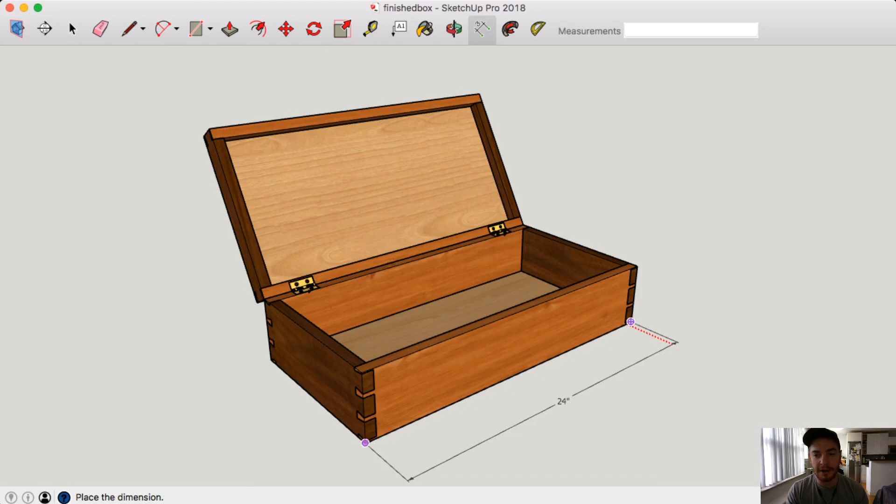The other cool thing about it is I made all of my parts accurate to my actual jig that I use to make dovetails, and that's cool because I can take these parts and print them, and I know exactly what dimensions I have to make everything. The other reason that it's useful is, say I was making a drawer box, then I would know exactly what sizes of drawer boxes I can fit in each cabinet, and it's a really easy way to not have to do this again in the future, because every time you draw a complex model like this, it's going to take you forever when you first get started.

So what I like to do is make design resources. When I say design resources, I mean stuff like dovetails. I don't want to go and redraw the dovetails every time. And what I did is definitely overkill. You definitely don't have to do everything that I did. But I like it because it saves me time, and everything that saves me time and increases my workflow makes me more money. So let me show you quickly what I did. Let me pull this up for you here.

This is definitely overkill, but I use a Leigh dovetail jig. I use the RTJ 400 when I make dovetails, and it's a router table dovetail jig.

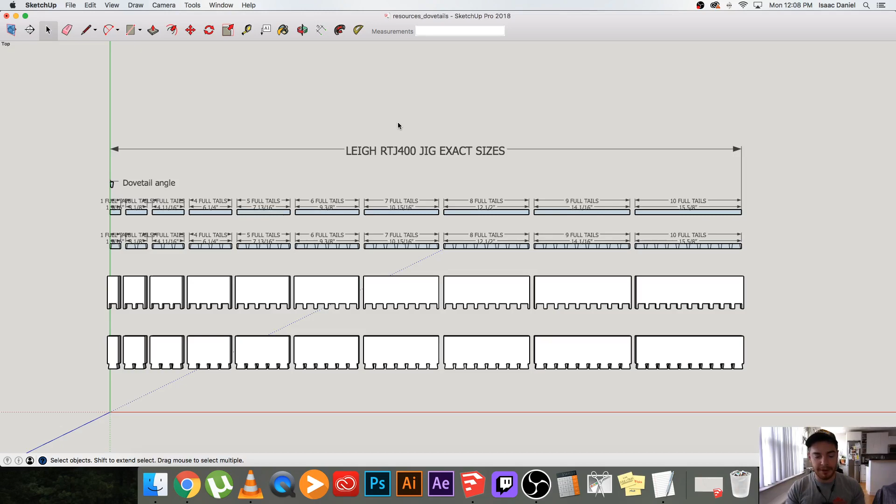Drink some coffee. It's a router table dovetail jig. The cool thing about it is it runs on the router table, so it's really easy. I don't have to hand cut it every time. One thing about it that's a little weird is that they have these odd sizes.

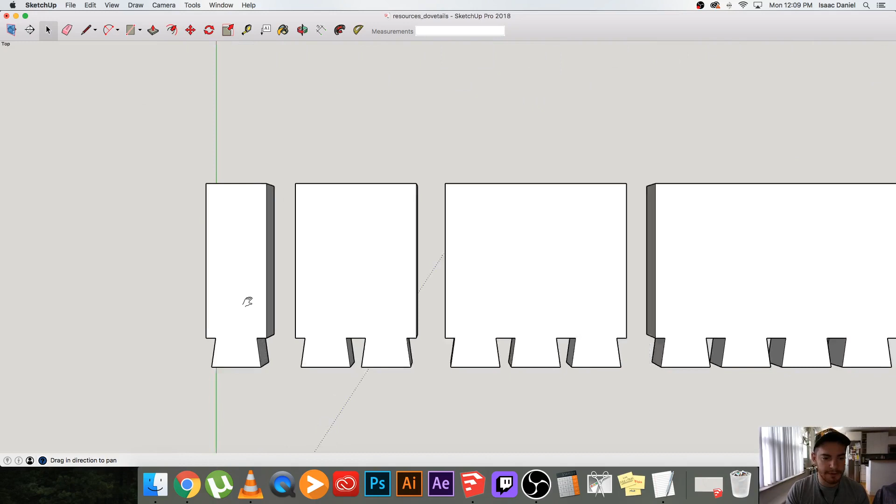Let me just zoom in here to measure the full tails. So when you count the tails, this is one tail. Or sorry, that's a half of a pin. But let me zoom in here. You can see what I mean. These are tails. That's a tail of a dovetail. So they count it by full tails.

The weird thing about the RTJ 400 is that it goes in 1 9/16 inch increments. So 1 9/16 inch is one full tail. 2 full tails is 3 1/8 inch. 3 full tails, so on. I'm not going to go through the whole list, because obviously you can go up to 10 full tails on this thing, and that's 15 5/8.

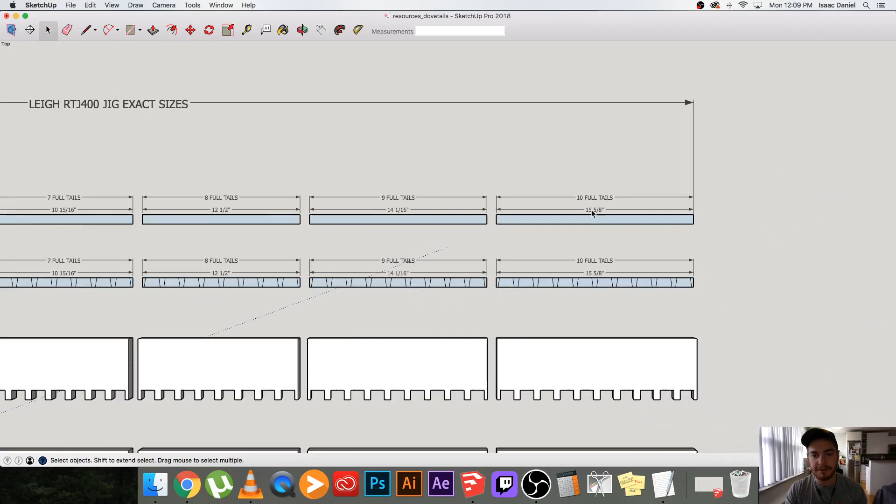That's plenty big for most applications, and that's going to be the actual height of the drawer. So that's a tall drawer, 15 5/8, or a tall box or whatnot. I probably wouldn't do anything more than that. You could do 2 panels and laminate it together.

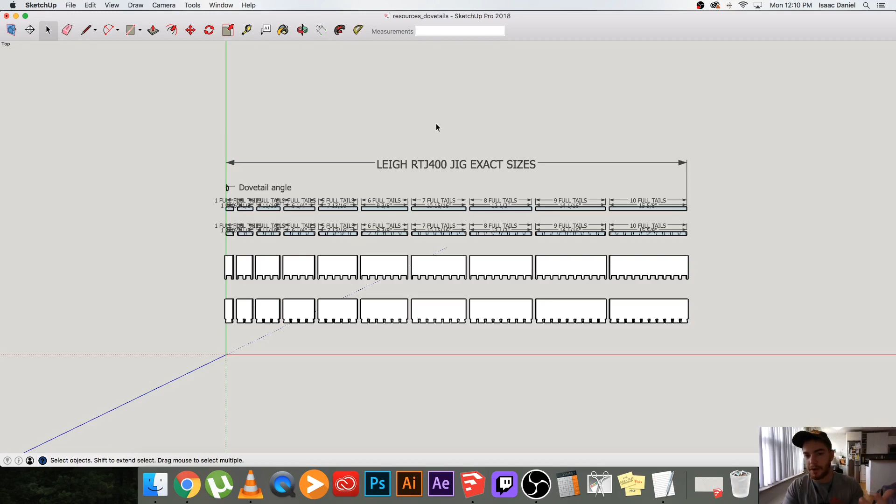But so this is my design resources. I save all my files, resources, dovetails. That way I can go through my different resources, other things I might have, like textures or live edge boards. I don't want to draw a live edge board every time. So here you are. There's your Leigh RTJ 400 exact sizes.

Now, you might not use a Leigh RTJ 400, so my sizes are not going to be the most useful thing to you, but I'll show you how I did this layout, and you could do a layout like this.

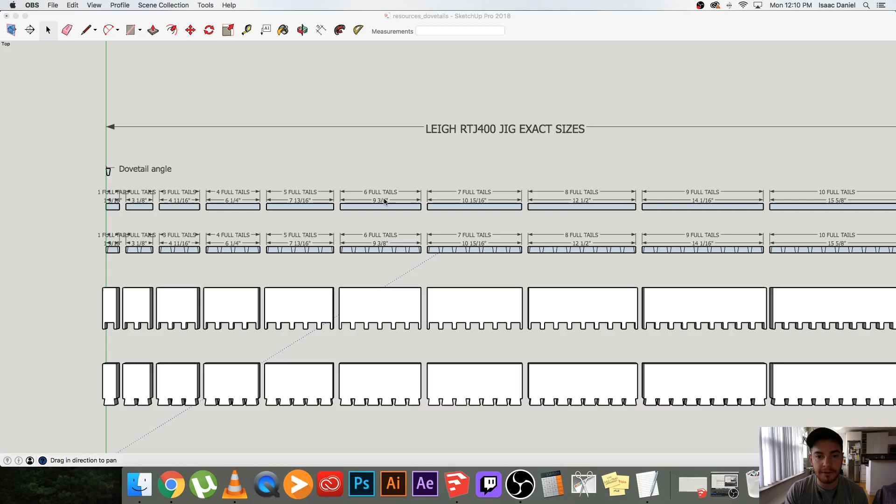Like, say you're not using the Leigh RTJ400 and you don't need to do 9 3/8, 10 15/16ths. Maybe you just want to do 2 inches, 3 inches, 4 inches, 6 inches, 7.5 inches, whatever. I'll show you how I did this quickly, and we'll go from there. But I'll show you why it's important.

The reason why I have this resource is when I go to a box like this box, let me just pull this up quickly here, I don't go and draw this every single time. I pull the shape from SketchUp, and I just add my textures. It's way easier. This is the same dovetail as on the list.

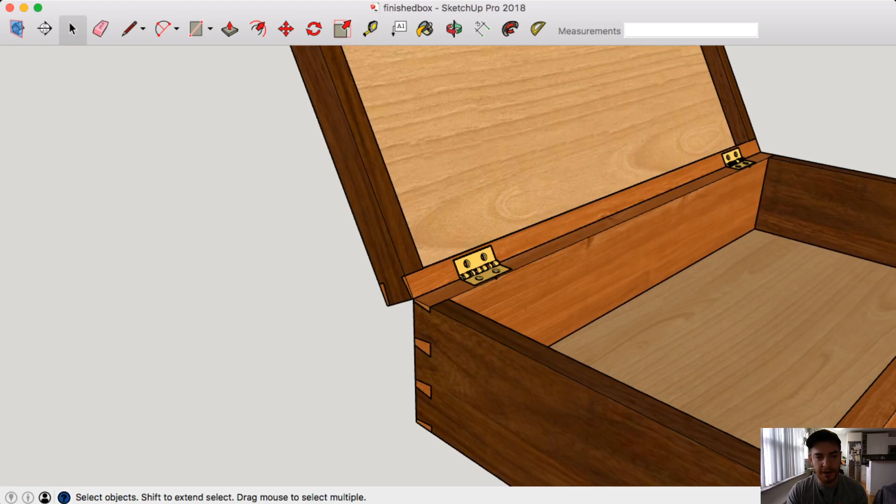The other thing is if I'm going to make a box, I'll make the box and I'll cut it just like I would make the box on the actual table saw. And I can see all these parts. I can see how big all these parts are. It's super easy. So start from the beginning. We'll do a quick rundown of how we actually do this, and then we'll go from there.

So if you are using a dovetail jig, you can usually find it on the internet. Go to your browser, search whatever manual. So dovetail jig XYZ, I don't know what the one you're using is called. I use the Leigh RTJ400 manual. So you just Google that. Everything will be on the internet. It's a great thing about the internet, everything's on there and it's ready for you. So pull this up.

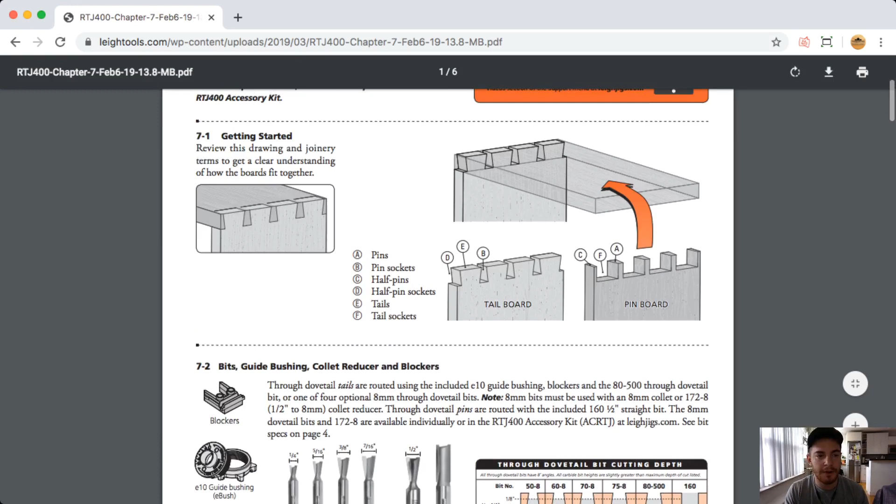For us, it has all this stuff laid out here because Leigh is amazing like that. So you got half pitch here. I think I did mine for full pitch through dovetails. So just check that out. And you could do whatever here. This isn't really important. This is just me rambling to give you a sense. So they have all the information you'll need, and we're essentially making something like this. We want to make this tailboard and that pin board.

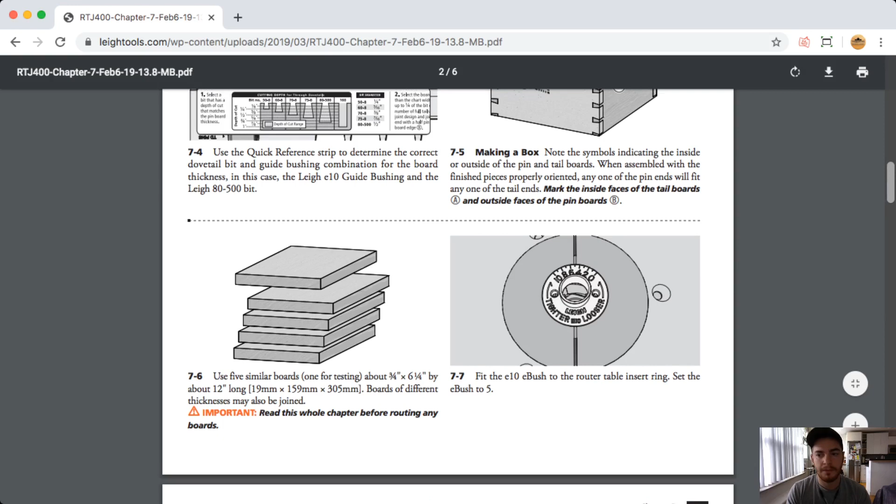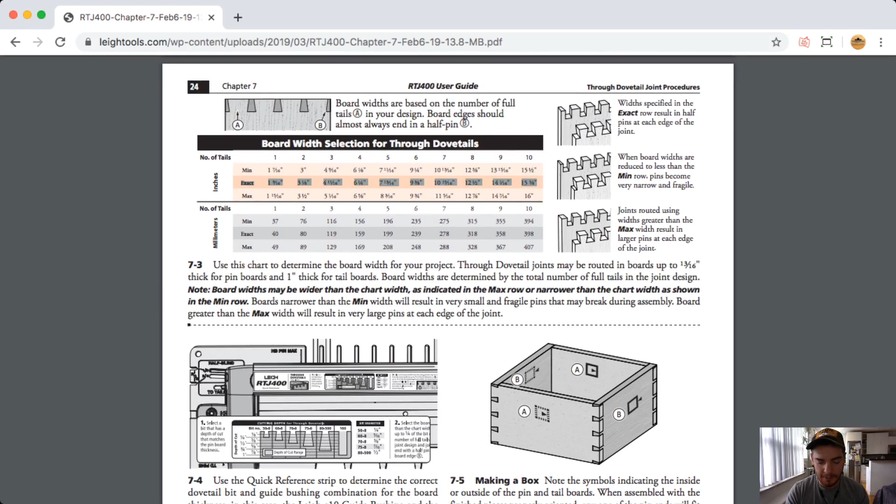But the cool thing, let me just get to where it has it on here. Their website's pretty slow. This will be one of those things where in the description I just say skip ahead to that section. So here we are. Let me pull this up a little bigger if I can for you.

So these are the exact sizes for mine, and as you can see, it goes up 1 9/16 every size. Which might not be important for you. You might, as I said, just be doing even increment sizes because that's what you make. The important thing is we want to make this board. This isn't actually capturing it.

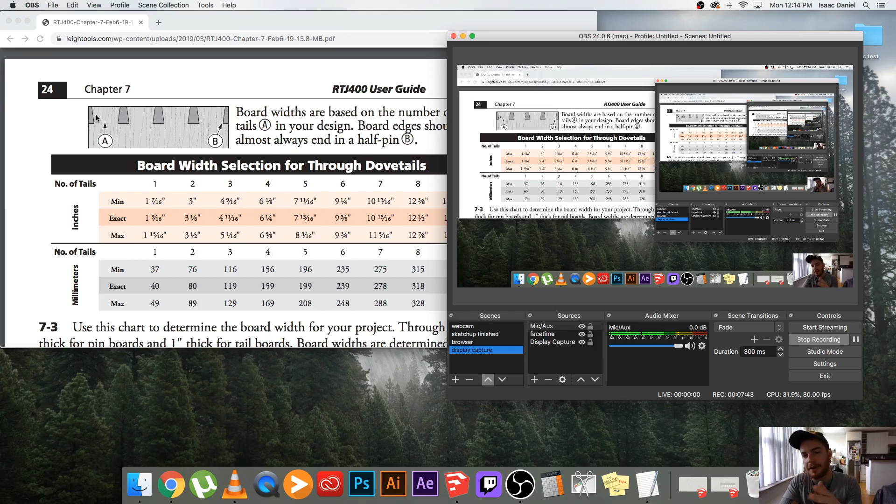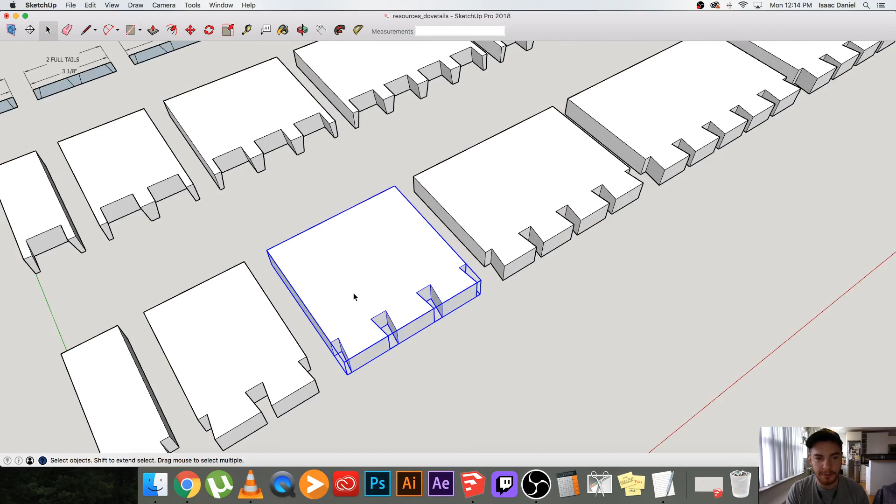We want to make this board, where we have every version of our full tails, and then, if you're going to make more and more boxes and they're all kind of a standard, you want to have these standards already done. So, like on my jig, I have every box I'm ever going to make in these parts already. So when I look at this, say I want to make a box with this size, I have my pins board, or 1/2 of the length of it, and I have my tails board. So I'll show you why that's important.

So let's pull up a working file here. And it doesn't really matter what size box you're going to do. These guys, 4 11/16, that's probably fine for a drawer or a box. So let's pull that up. We'll go to our working file here. We're going to take that.

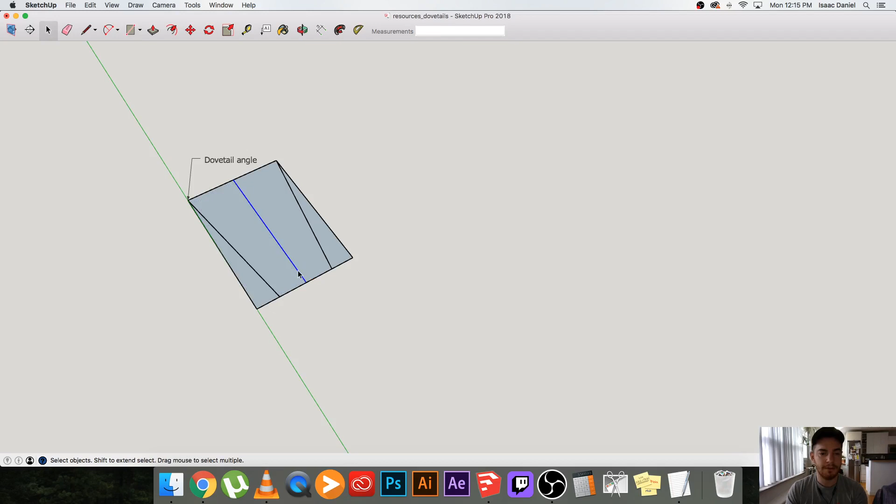So how did I make these? I have this little angle here. That's my router bit that I use. But say you're hand cutting it, maybe you're hand cutting this shape. Well, what is this shape? Essentially, what this shape is, is the size of half of your pin and the depth that you're going to cut.

So I actually usually make 1/2 inch or 3/4 inch thick boards for drawers, or 5/8 of an inch, depends on the project. So that's what you're going to want, is figure out whatever material it is that you're going to do. Say you're doing 3/4. What you want to do is make this shape.

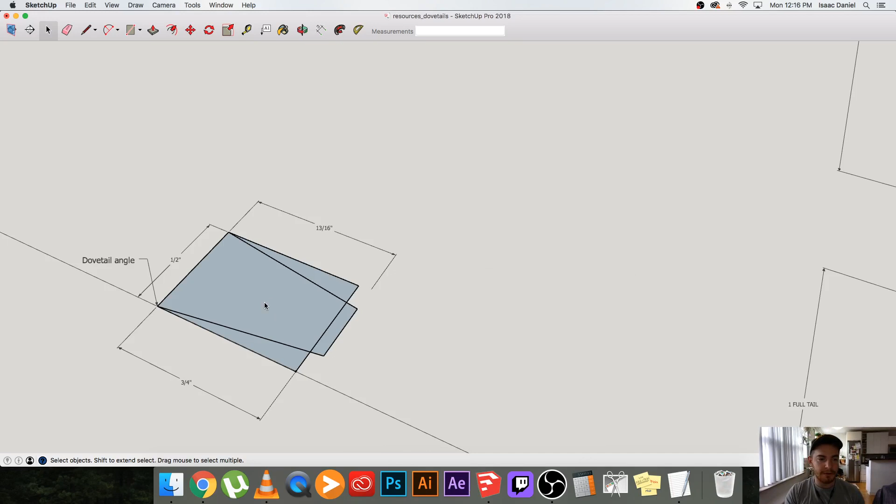So, a common dovetail joint is 8 degrees. You might have it in a ratio, 1:6 or something like that, which is totally fine. Let's say you're doing something like me, where you're doing just an 8-degree joint. I'll show you how I did that quickly.

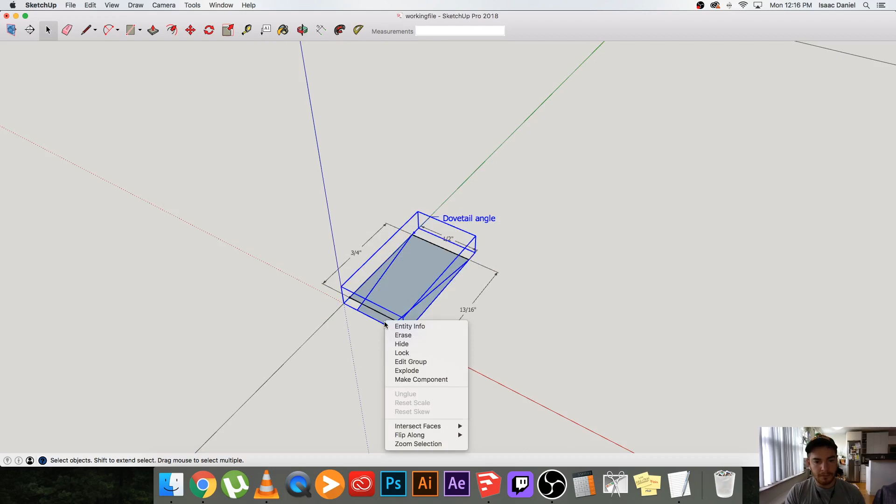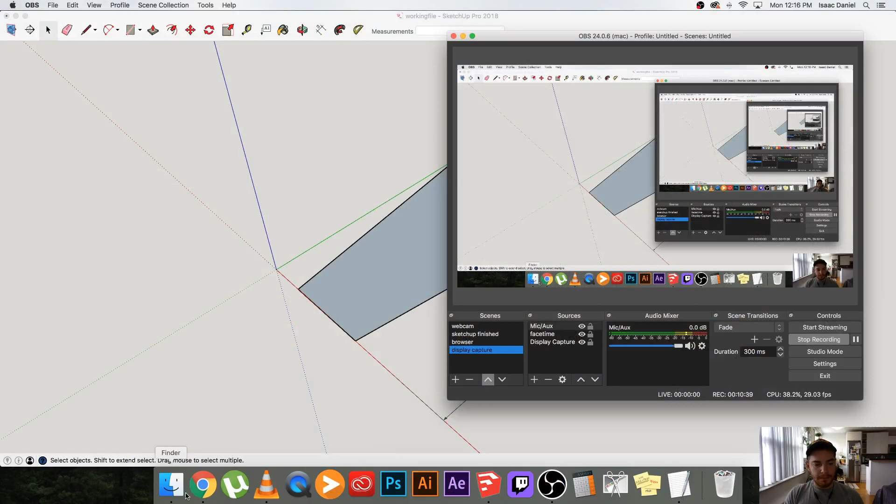So specifically for my purpose, we'll delete this just because we don't need this for a second. The Leigh dovetail jig uses router bits to do the cut. You can look up the different Leigh router bits that you might use in your jig. So let's look that up.

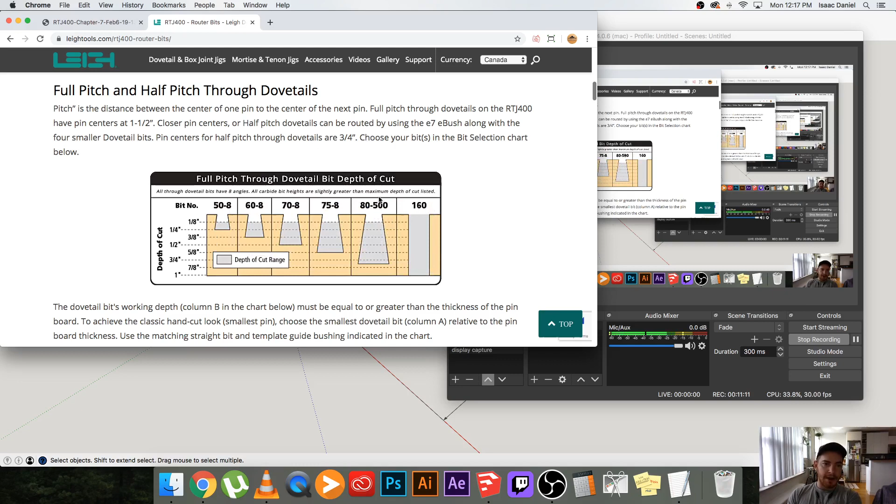Just give it a second. The Leigh site's really slow. The cool thing about it is, say you have these sizes here. I know I'm going to use the 8500 to do the majority of my dovetails because it's a big bit. It's a 1/2 inch wide bit, and it makes a nice looking pin.

Leigh's site has all of this information on it, and all you really want to do is see this image here. It shows you, sorry, I zoomed in too much. It shows you the depth of the cut that it can do and the overall diameter of the bit, and that's what we're going to use. Oh, that and the angle of this bit. So scroll down here to the 8500. So 8500 here.

You have B, which is your cutting depth range, they call it, 13/16. A, your overall diameter, 1/2 inch. And it's pretty small there, but F is your angle, 8 degrees. And that's 8 degrees from the side to the cutting tip. So that's your 8 degrees, not from any other point. And you might screw that up the first time you measure it, but I'll show you why that's important.

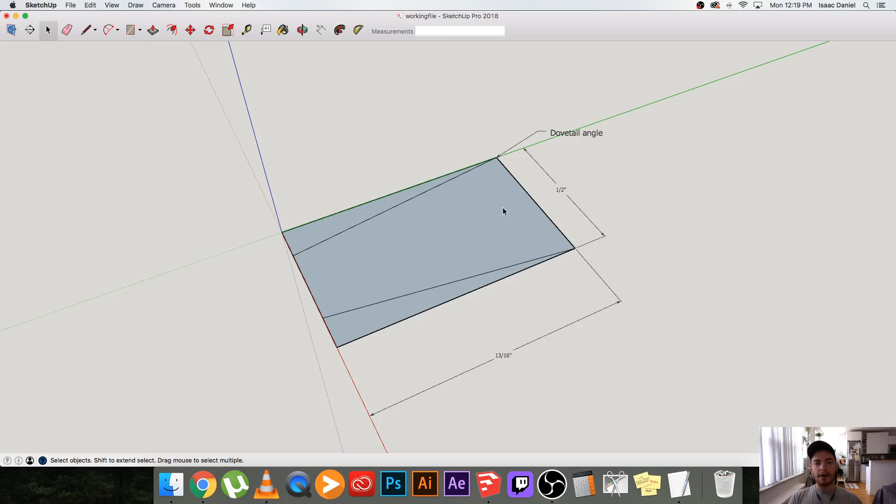So here's our dovetail jig. So let me just make this rectangle. It's easier to make it this way. We have our 13/16, which is our actual ability to cut on the Leigh router, and we have our 1/2 inch cutter head, which is the actual width of this cutter head on the Leigh jig. And if you go into here, there's our 8 degrees. You can see it at the angle finder at the top.

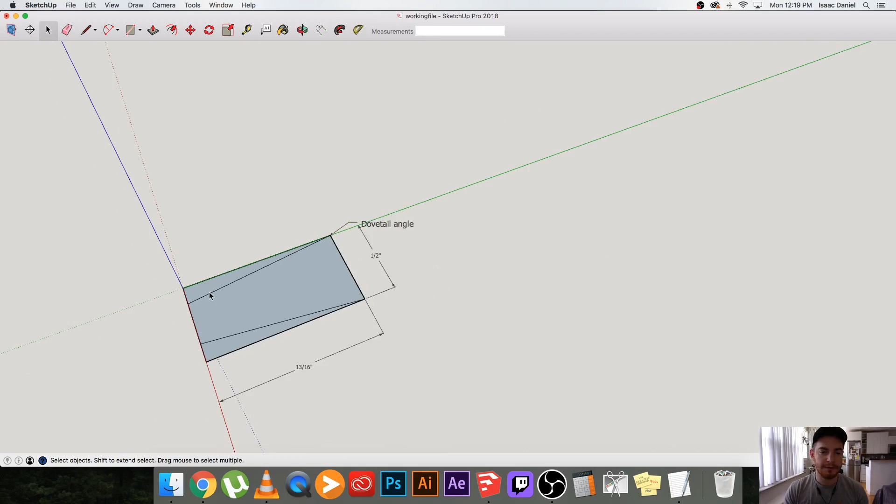So you might not be using that cutter, but say you're using another one. Say you're using something that's 10 degrees, something that maybe you have 3/4 inch, let's say. It's 3/4 inch length, and it's 1/2 inch cutter head. So there's yours. Just imagining that's what yours is. Take your actual router bit, measure it, or look online, and you'll see that.

You can take the protractor tool in SketchUp, go to one of the corners, go from one of the lines, and put whatever angle it is that yours is. So say yours is 10 degrees. You can pull up your line tool. I just press L, or you can go to the actual tool and click line. Go from the corner, and SketchUp will snap to that new protractor point that we put in.

Do it again on the other side, and you've got your cutter head. And that'll all be accurate to your actual router bit, and that'll be cool because your actual file will be exactly what you're making. So just finish off this rectangle.

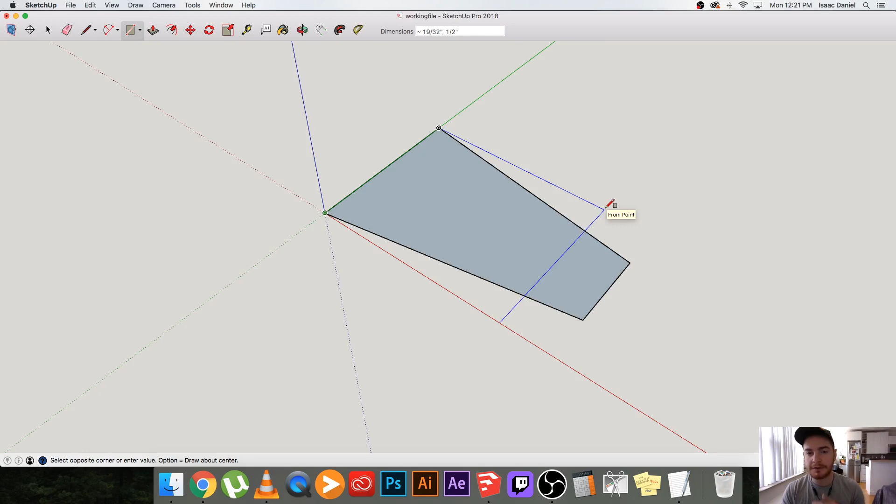The next thing that you're going to want to do is figure out what panel thickness you're going to do, whether that's 1/2 inch panels for your walls, or 5/8 inch panels, whatever board thickness it is that you're going to use for yours. So you're going to do 1/2 inch boards. Finish that rectangle. You can go ahead and delete the rest of these angles now, and you're left with this square, and I'll show you why that's important.

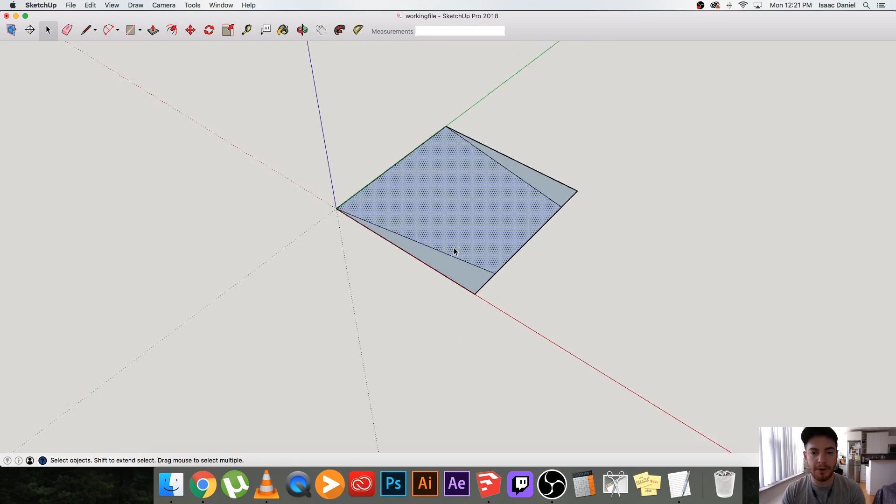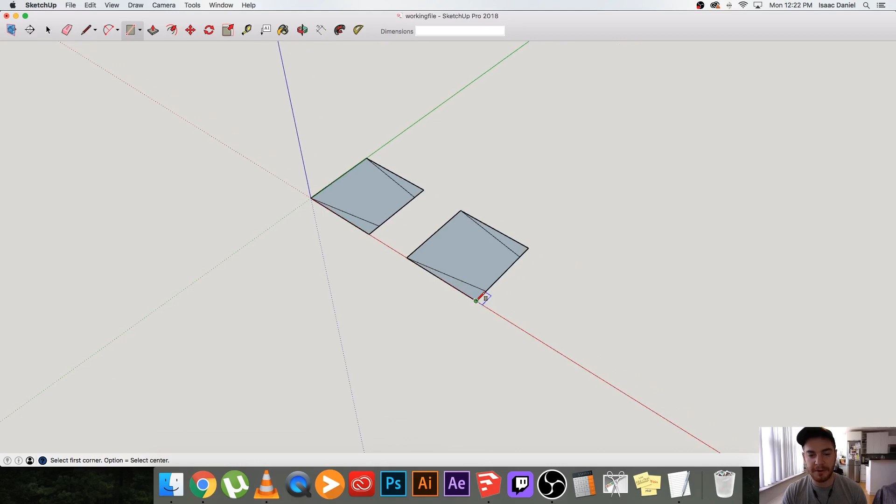Take this square. As I said, the Leigh jig uses 1 9/16. Yours may not use 1 9/16, but we'll just assume that we're sizing our boards appropriately with that. You could also be hand cutting these where you would take your compass and divide it with your compass, but we'll just assume that this is similar to my jig. But as I said, it can be anything.

Take this object, paste it in, and essentially what we've done is created our first stage of our tails and pins as a 3D object. You can delete the rest of that stuff, or you could keep it.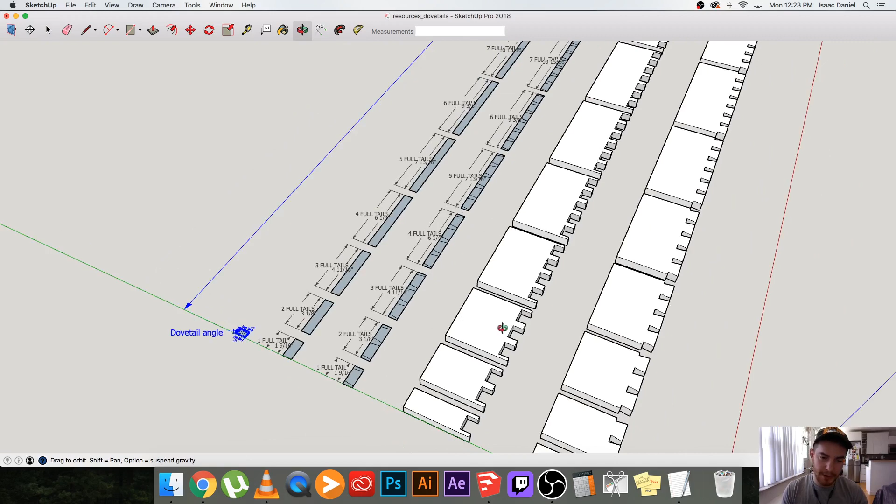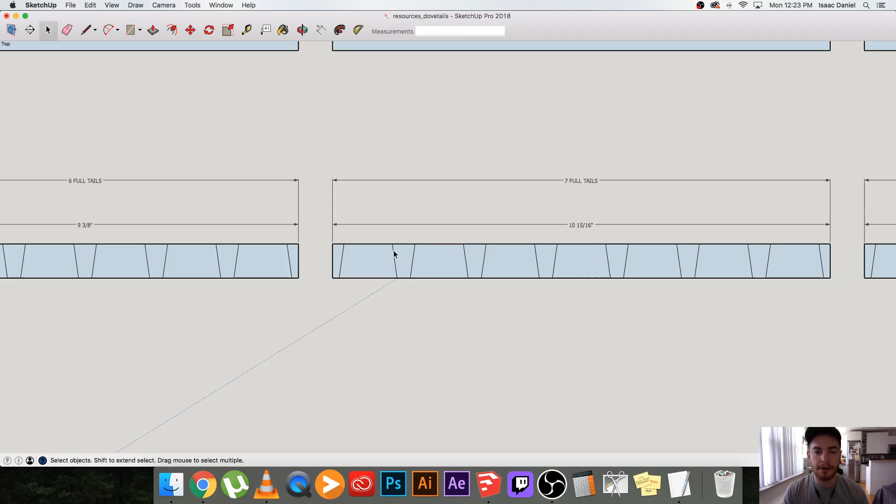So I'll show you what you can do with this. I use that to make all of these, and I'll show you my resources. I have it organized so that I have all of the artwork that I'll ever need to redraw any of this stuff in case I need to do something a little bit different. Say I want to have a point in this where there's a channel to put a drawer bottom or something like that. I don't have to go and redraw all of this stuff as a model. And everything here is accurate to the actual size that we're going to make.

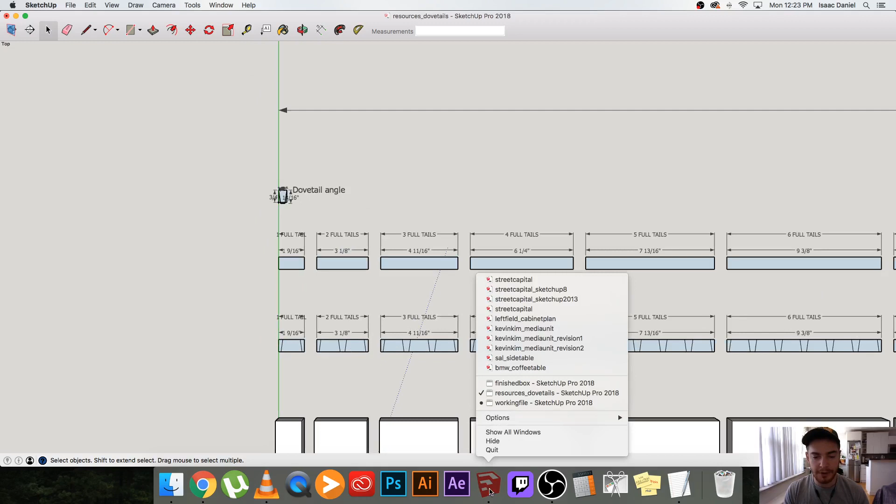But all you essentially need is this piece, that original one, and then you can do as many in a row as you want. And I'll show you how I did that. Go back to our working file here. I could take this, 1 9/16 increment, or yours might be 2 inches or 3 inches or whatever size you normally do between your tails. Now we've got something that we can use to create the tails and the pins board. So I'm going to rotate this quickly just so it's easier for us to follow along.

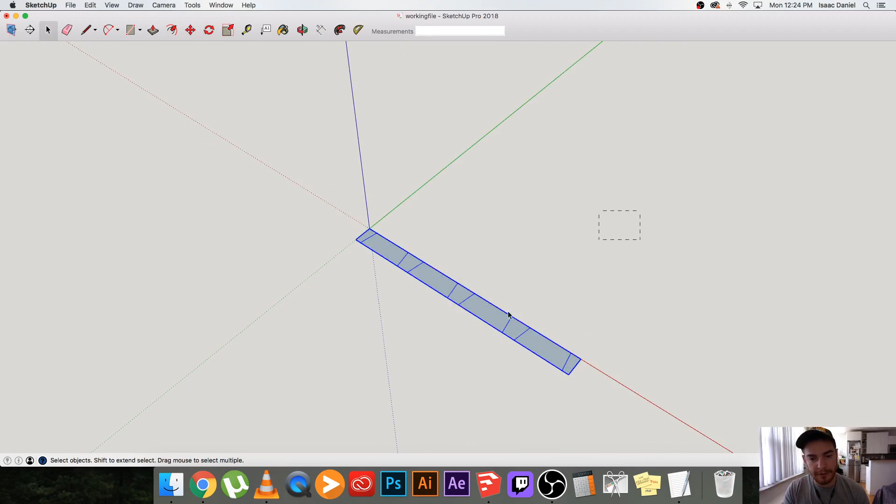I want to make this a group so I don't have to redraw this again because I hate redrawing stuff. I'll copy it, and let's make the pins board first. It's a little bit more straightforward. So you got your file, it's copied, it's a group. Let's go and explode this quickly. Take one of your pins, and we're going to push it up. You can see it's already starting to look like a pin board, right? Our boards are 1/2 inch. That's the thickness of our finished boards that we're going to be planing down or sizing. Whatever we're milling to is what we're making our pins push to.

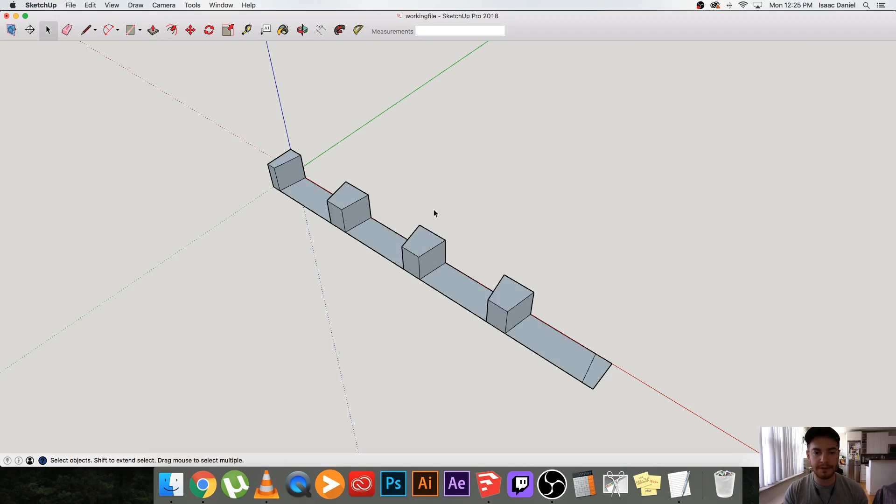So I took the push-pull tool. It's P on the keyboard, or you can go to your actual tools bar and grab it, push it up. You could either follow along the points that you've already pushed, or you can go anywhere and go to your measurement section and just write 1/2 inch. Same thing for the last one. We'll just snap it to the same place. So there you go, you've got pins. Make that a group.

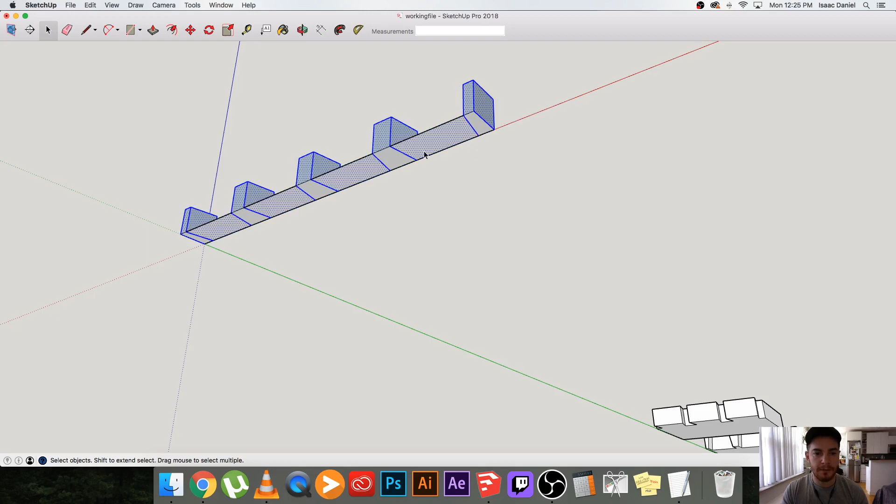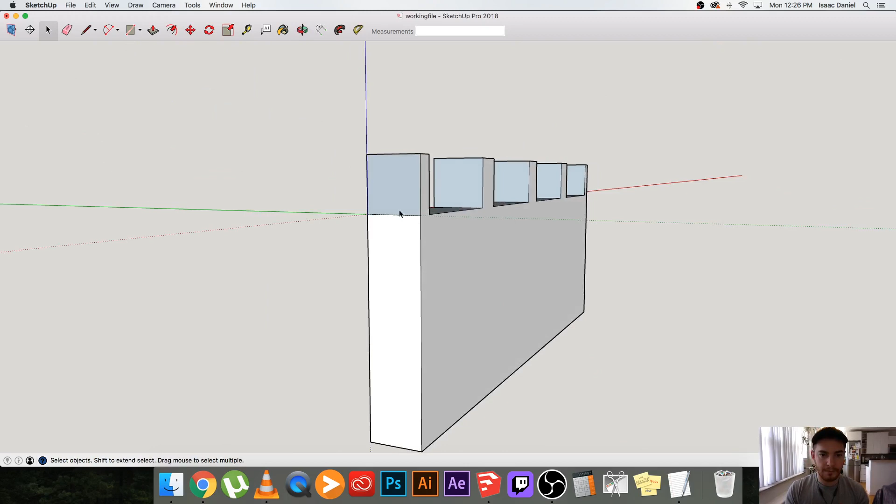So you see at the bottom of it, we're missing some geometry here, right? Let's go and make a rectangle here. Explode this. Sorry, keep that rectangle. I usually like to make these some amount of inches just so it's easier to see. It doesn't have to be anything in particular. Go and explode this. You can delete all these lines now. Now you've got a pretty good resource for a pins board. And I only do 1/2 of it. I don't do pins on both sides, and I'll show you why.

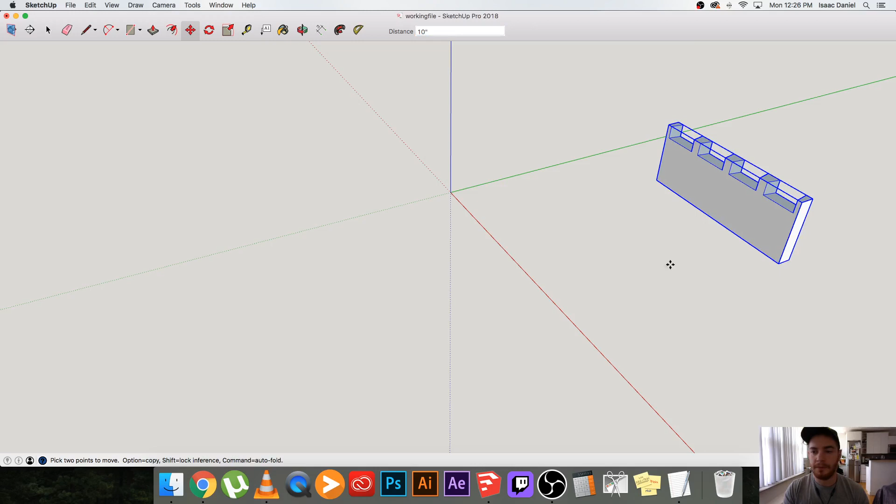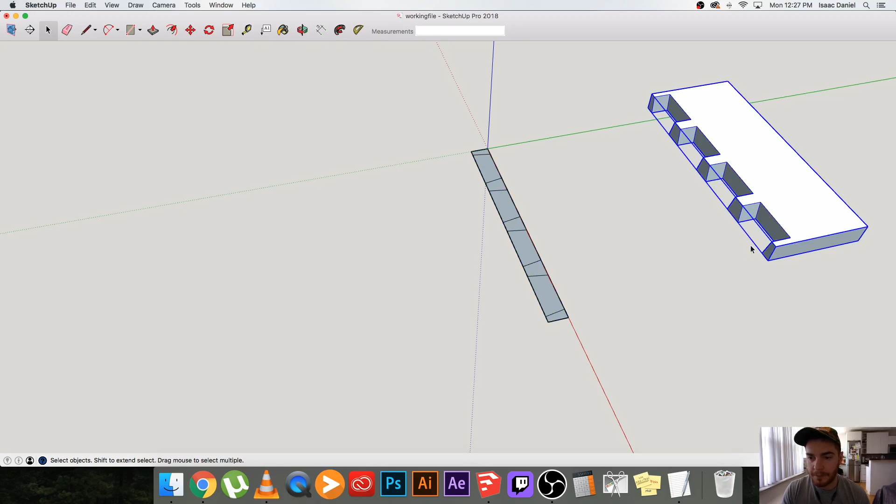Let's just move this over a little bit. We'll rotate it just so it's easier to see. So now you got your pins board here. Let's flip this around so we can reference it. Here's your pins board. Your pins come out of the board. Now we have to make the tail board where the tails stick out and then a board comes through it. Honestly, everything on SketchUp is pretty easy to get a grip on. We're gonna go back to, guess what, the push-pull tool. Hey, you could draw these rectangles by hand. I barely draw out shapes by hand if I don't have to.

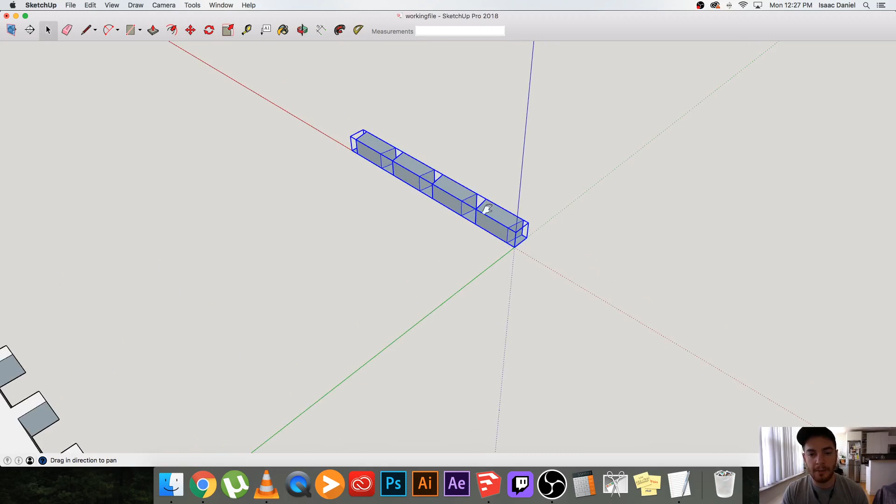Push it up, whatever our board thickness was. Remember, our board thickness was 1/2 inch, so we push it up 1/2 inch. But it could be 3/4 inch or 5/8, whatever you make your panels to. And that'll probably depend on whether you're doing drawer boxes or regular boxes, anything like that. So you've got your pins pushed out. Now, the last time we made a rectangle and we pushed it down to create our pins, this is going to be a little bit different.

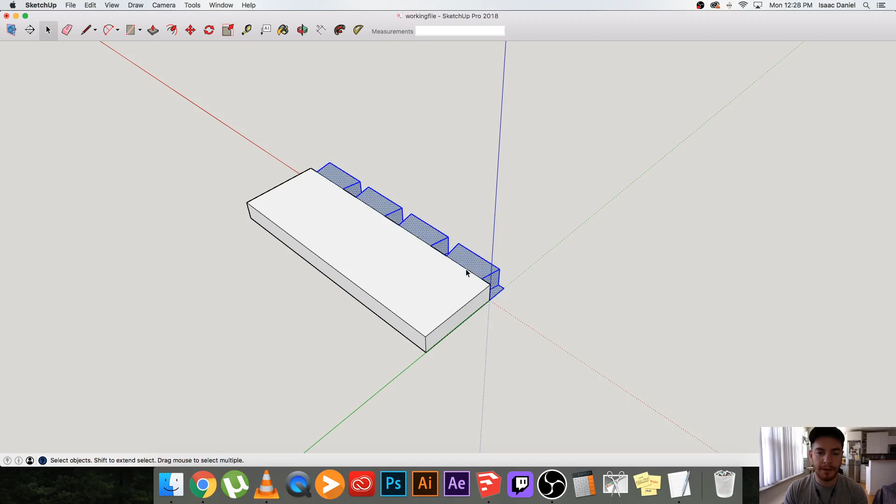We're just going to take our rectangle tool, draw out some rectangles, because our pins go at the opposite orientation. So we want to make sure that it's going the correct orientation for what pins are. And once again, we can go and delete a lot of these lines. And you've got yourself a tail board and a pin board, or half of each rather.

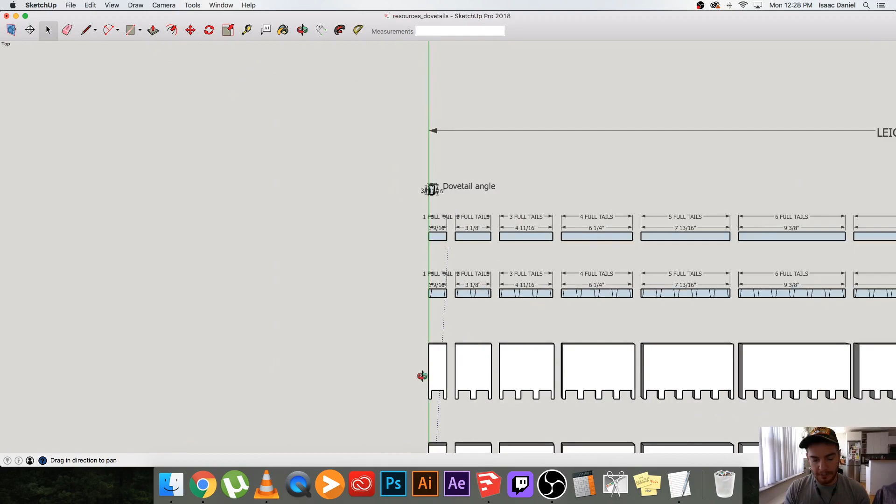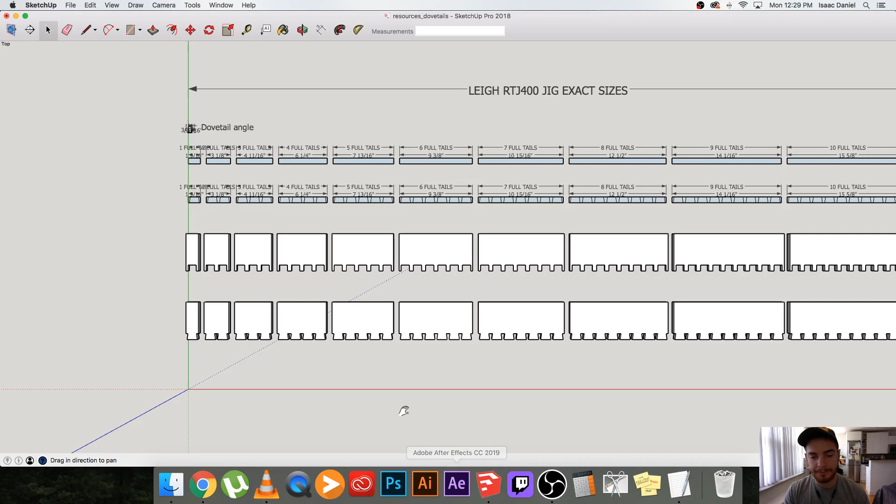Now, when I did my absolutely ridiculous resources section, I didn't go and make that over and over again all the way up. I just made the first one pin, and then I doubled it and I deleted lines. I didn't go and draw that whole file every time. Otherwise, this would have taken me forever. But because my jig uses 1 9/16 inch increments, it worked really well for me. And yours might be similar, but in any case, we'll go back to our finished box.

So now we've got these two pieces. What do we do with that? We got to build a box. We can delete these because we don't really need to make those exactly like that. So we'll take this, make a group. That's already a group. And we're going to orient this as if we're building one side of our box. So our box is standing up.

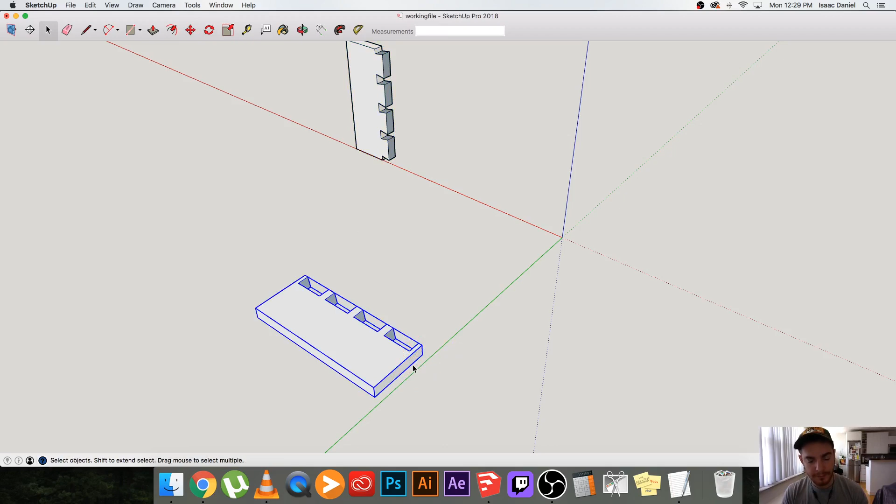These are going to be our pins, so we'll move it over. I'm just using the move tool, M on the keyboard, and the rotate tool, which is Q on the keyboard. So I'm not going to explain every tool that I use all the time. If you have any questions, feel free to message me.

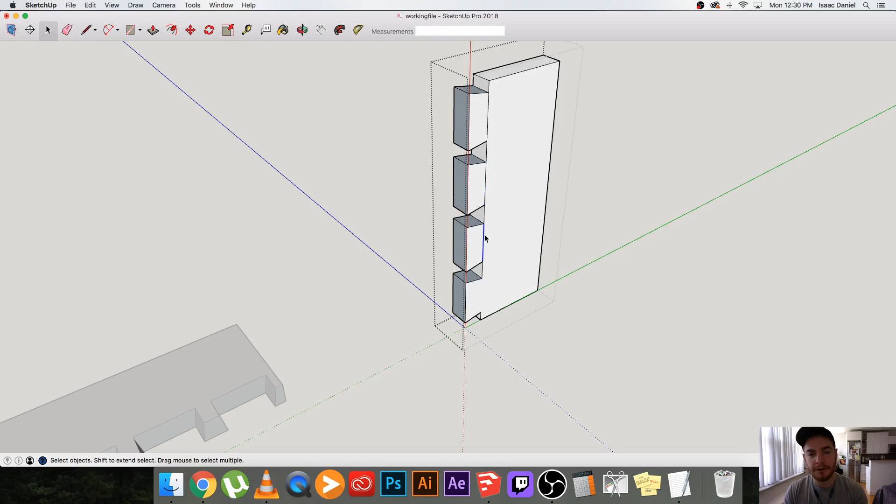And we're missing some geometry here. What happened? Sometimes when SketchUp's missing geometry, you just have to go and redraw the lines because it's not going to guess the lines for you, but it's pretty straightforward.

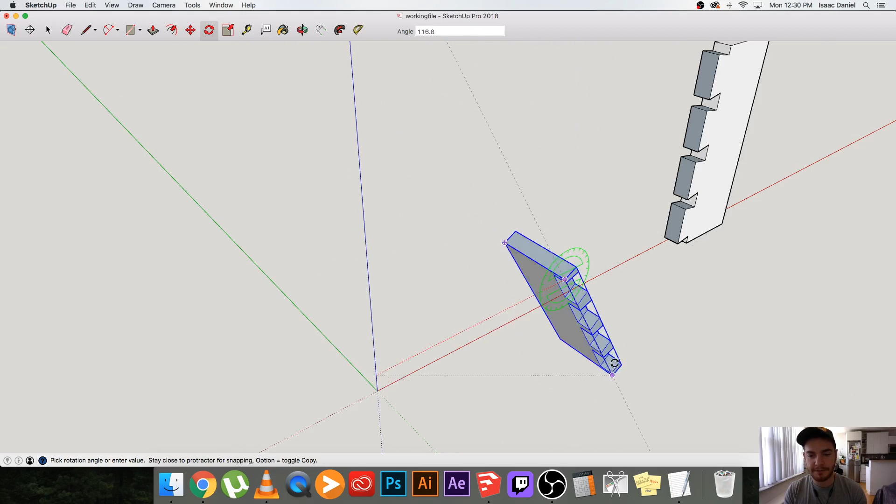So we'll take this board and we'll rotate it again so that it's standing up. You can just press the arrow keys to go to the different rotate abilities. We want to rotate it along the green axis, 90 degrees. Stand that up. Now, if we've done our measurements correctly, these two will line up. If we haven't, they won't. So we've got one corner.

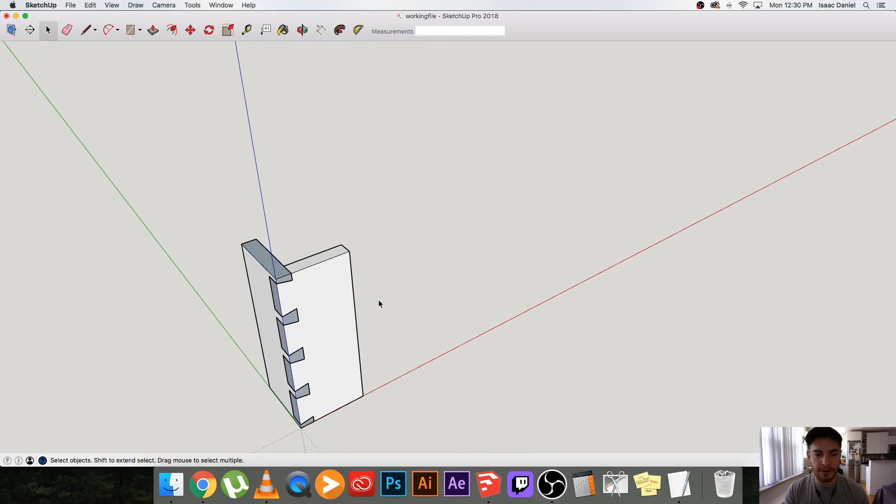You could have built each one of these specifically to whatever size you want, but I don't do that, and I'll show you why. I have these two pieces. Say I want to build a different size box. Say, normally I make a box and it's 12 inches deep and it's, let's say, 24 inches long. But the next time I build a box, it's only going to be 6 inches deep. I'd have to redraw that entire panel, which is crazy. I'll make it bigger just so it works better on this video.

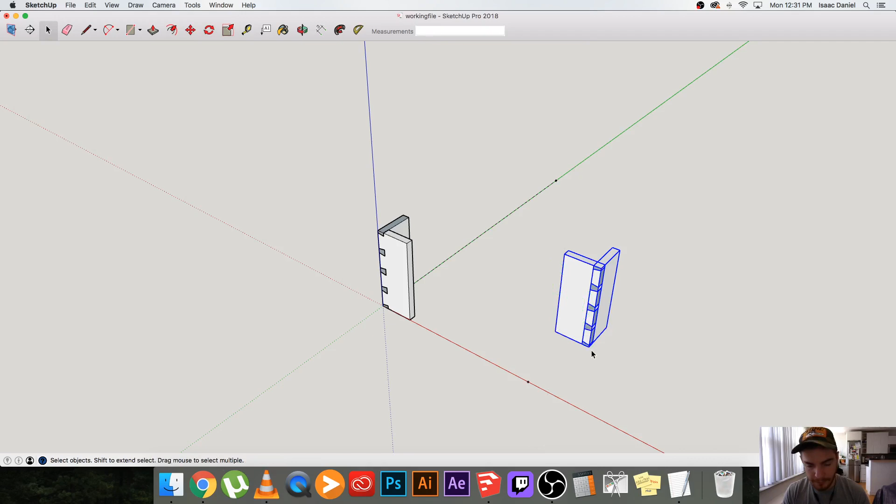But take these two parts, copy it, Command C to copy and Command V to paste it. We'll rotate it again. And you could flip those parts as well, but because our parts are identical, we can just rotate it. And we'll just snap it to the guide point. You'll see on your screen a little thing will say guide point. That's how you know you're in the right spot.

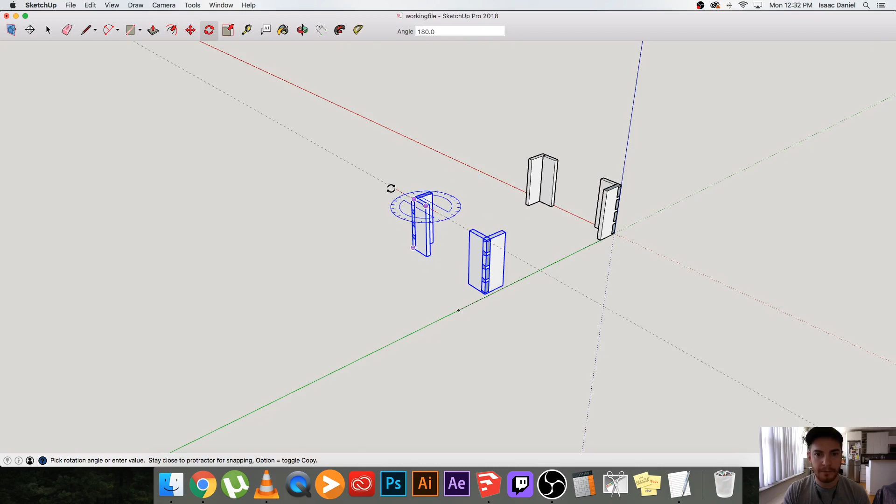And we've got one more side to do, so we'll take these 4 parts, copy it, turn our camera around. It's Command O to orbit, which is your camera movement on your viewing screen. It's O to hit that, and H brings up your hand to move things around. So Command V to paste it again, and we'll turn this 180 degrees. And we'll drag that onto our guide point. So we have our 4 corners.

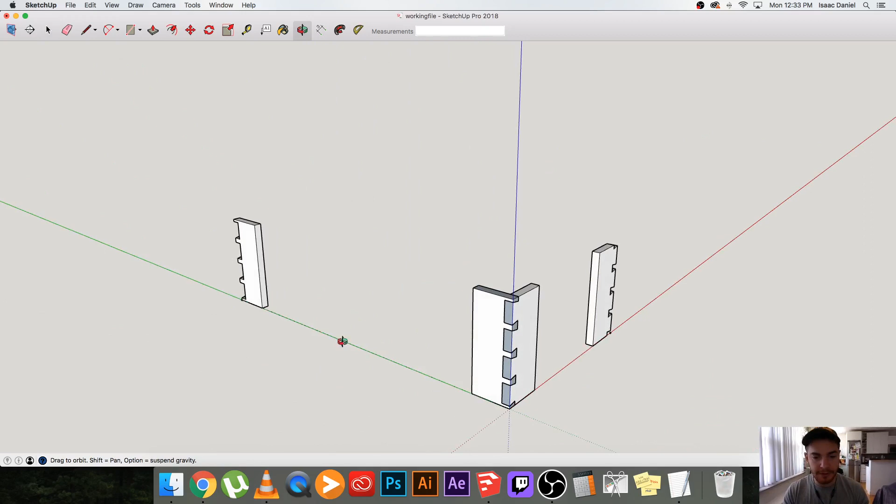Once again, we're going to be lazy. We don't need to draw every part. So we'll delete some parts. What we do need is 2 of our pin boards, 2 of our tail boards. So this is the depth of the box. This is the length of the box. That's all we need. So we'll take this board.

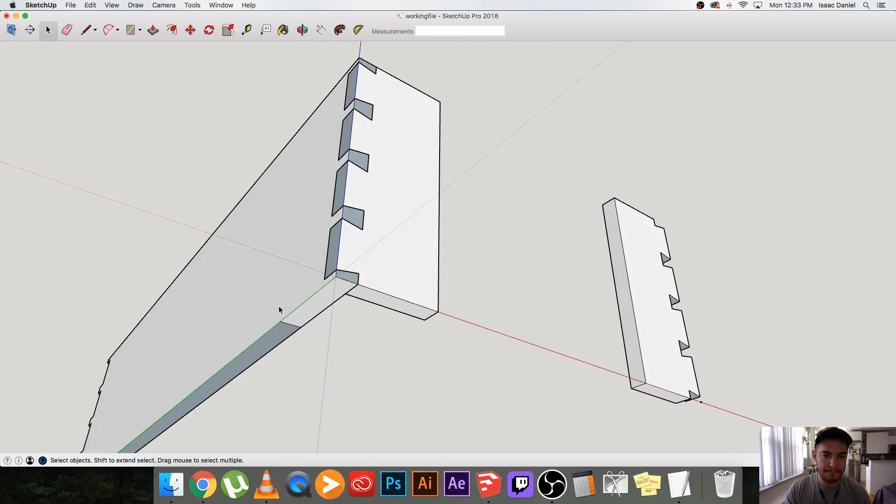As always, we're going to get the push-pull tool. We're going to use this all the time. Move that right over. We can take these 2 parts and explode them. Delete some lines. Now we've got, let's make this a group. Make these a group. We can hide this. We can delete that guy because we don't need it anymore.

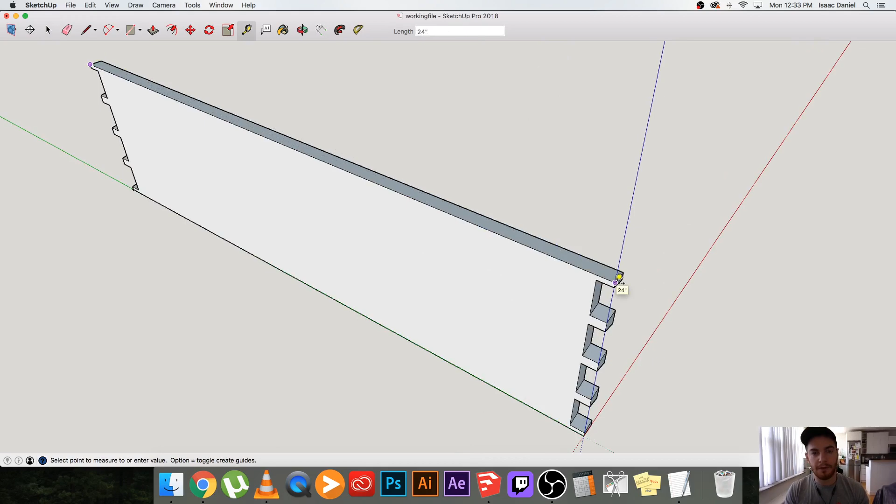Now we've got our pin board. It's the accurate length, 24 inches, what we need for our box. It's got pins on both sides in the right orientation. We've got our 1 pin board. We don't need to redraw that again. So let's go to our hidden geometry. We'll hide that. Turn hidden geometry back off. We'll do the same thing for our tails.

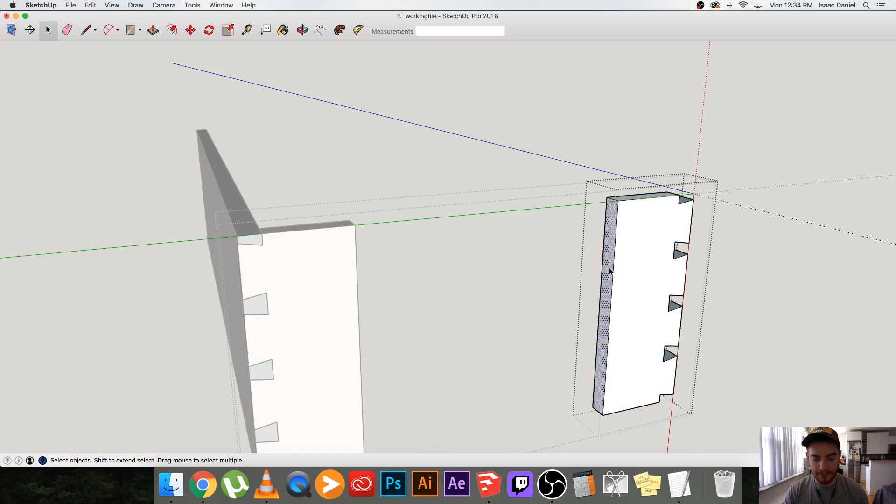I'll probably misspeak 100 times as we're doing this video and just call one thing the other. It's a pin board, tail board. I'll probably get it backwards a whole bunch of times.

There you go. So we've got our 2 boards. Now go and make that a group again. You got them here. You can just copy them and paste them, flip them around, grab it from a point that is going to be on both sides, put it in position, and everything fits. You've got yourself a dovetail box.

From here you could add a drawer bottom. You could cut it in half before we do this if you want. It could be a dovetail drawer. It could be a dovetail box. I'll show you quickly how I might make a drawer runner. Actually, let's unhide that quickly.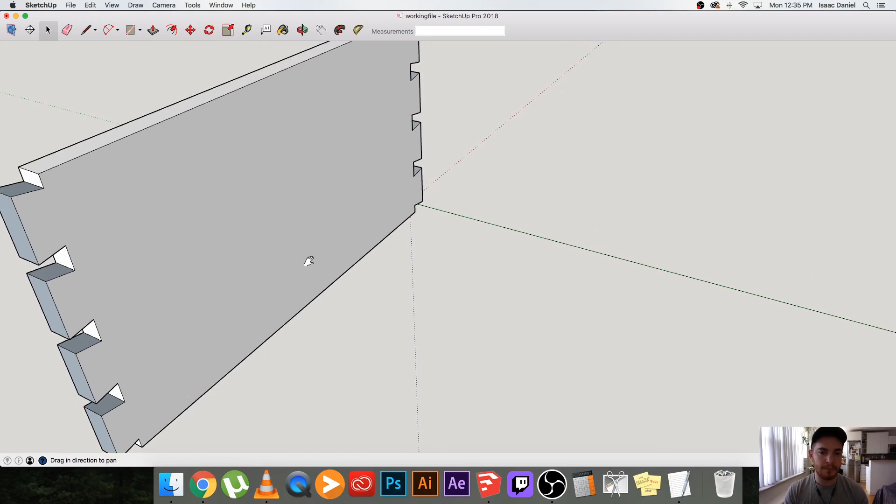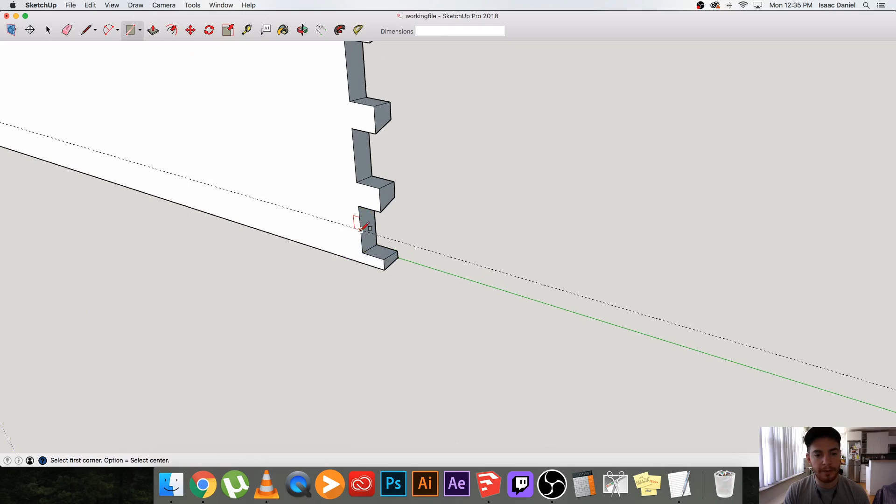If I'm going to put a drawer bottom in this, let's just turn on the hidden geometry for a second. I'll probably do something like a 1/4 inch drawer bottom. And I'll want to cut it so that it doesn't interfere with where my pins and my tails are. So for us, that's 25/32. Let's pull that up there. That's going to be a 1/4 inch.

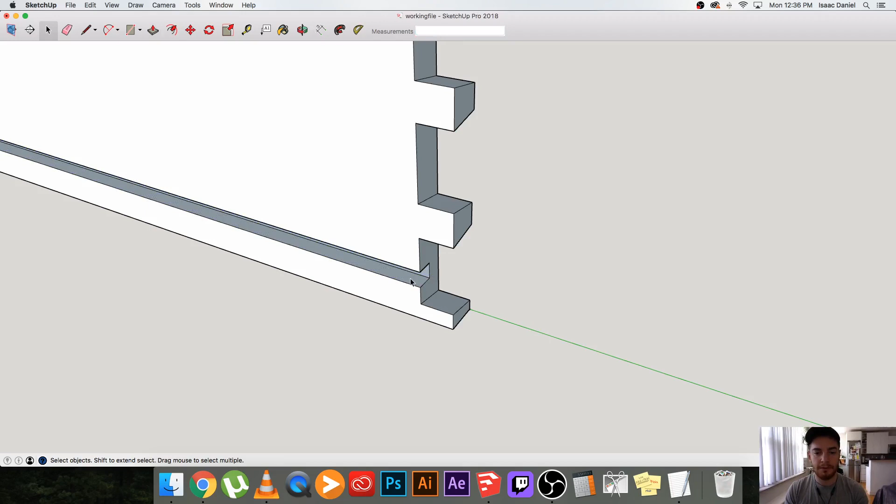I'm just guessing. I'm sure this is probably going to end up being the wrong location, but for this video, it'll be fine. We can take that, we can push it in however deep we do it on our actual build. Make that a group and hide this. Turn the hidden geometry back off, and we can go and continue that cutout there. Go and hide this piece so we can just see as far as it actually goes in.

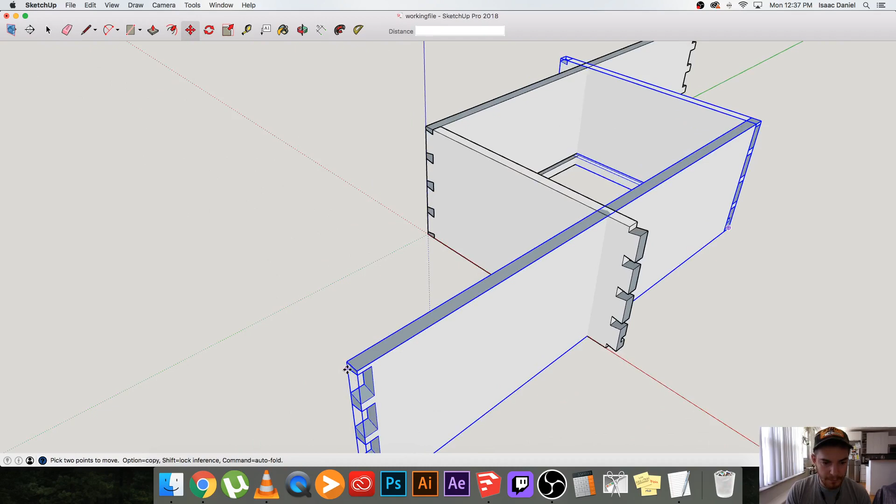There you go. Now you've got the channel in the actual boards, so you have it for your plan where you might actually put a drawer box or a drawer bottom. And you can do the same thing. You can take these two parts that you need, copy them and paste them. Now you have your location for your drawer bottom. Your drawer bottom is just going to be a rectangle that fits into that slot.

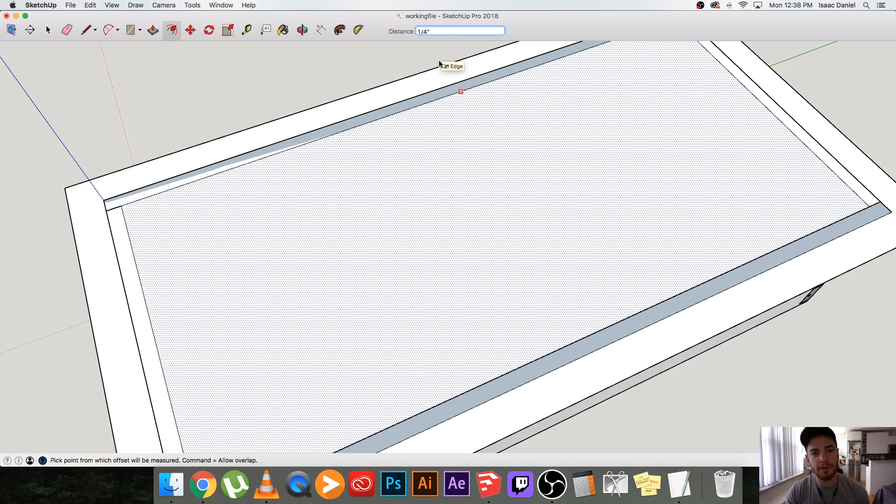Take that. You can press F for the Offset tool if you want to increase the size of it. And you can actually put in, we did a 1/4 inch cutout. Say your cutout is different. Say it's 1/8 of an inch. You can make this distance whatever that distance is. We did a 1/4 inch, so it's pretty straightforward. We made our cutout 1/4 inch tall, so we can do that when we push it up. 1/4 inch. And there's our drawer bottom. Group.

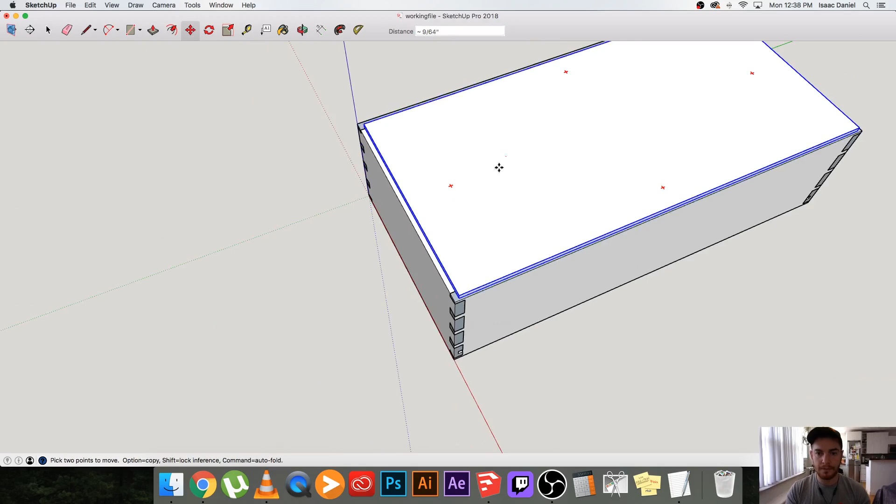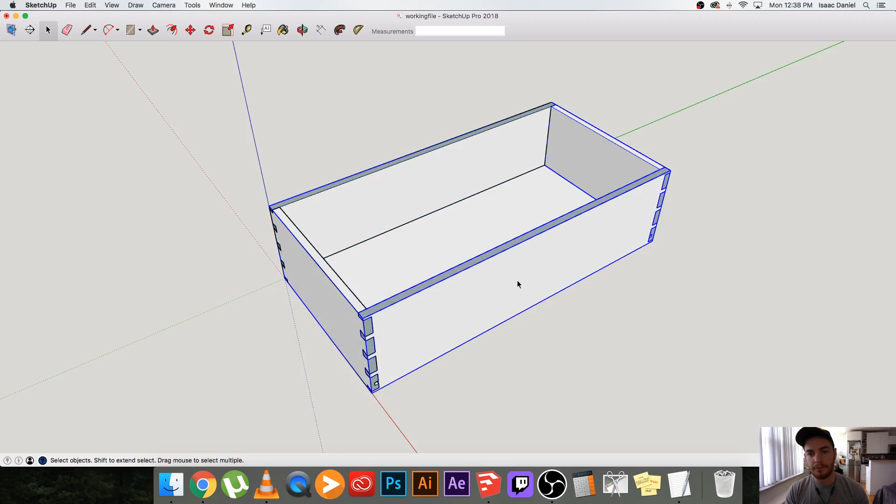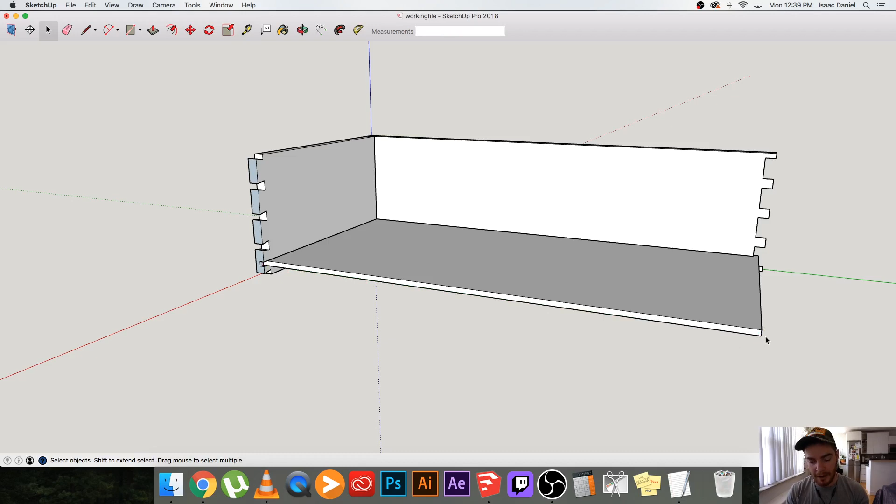So now we know exactly how big all of our box panels are going to be, including, make this a group, make this a group, including the actual dimensions of our drawer bottom, which would have been pretty easy to figure out for this box because it's pretty even increments, and we just did 1/4 inch cutouts. But as we said, yours might be different. If yours were different, it would do all the math for you, and we'd know that that's 23.5 by 11.5, which is pretty cool. It's cool that SketchUp does the math for you, because whenever you can avoid doing the math yourself, that's good. And that's one of the reasons why I really like SketchUp.

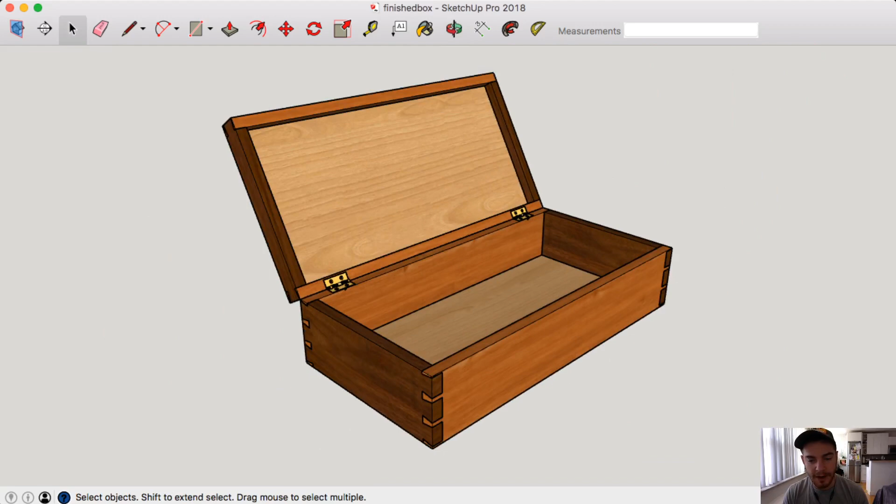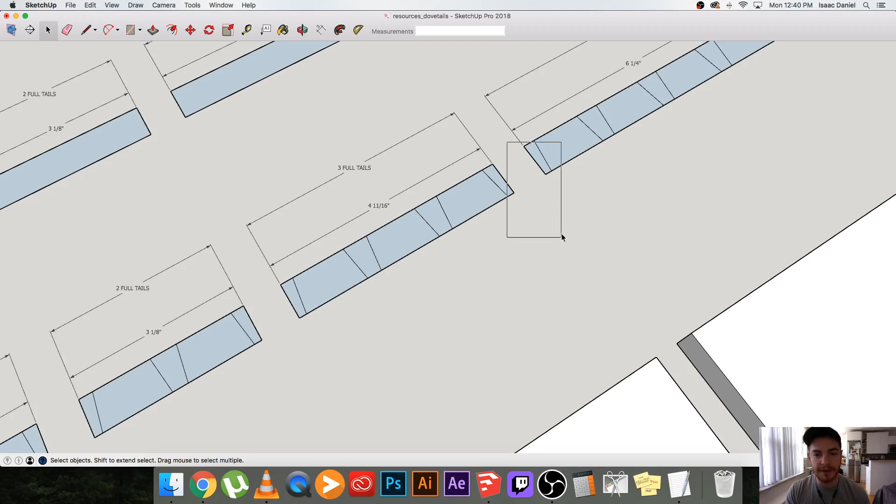And I don't have to go and make this from the beginning every time, because I have my resources file like this. It has 1/2 of my pin and tail board for every size that I'm going to make. So my pins board for 1 tail, 2 tail, 3 tail, 4 tail, whatever. Or if I know that my drawer has to be somewhere around the 6-inch range, or it has to go under that, then I know what size to do, and I don't have to redraw that. I just take these two parts and build a box out of those, and it's as easy as just taking the parts and rotating them, and that's it. And that's the easiest way that I found to make dovetail drawers.

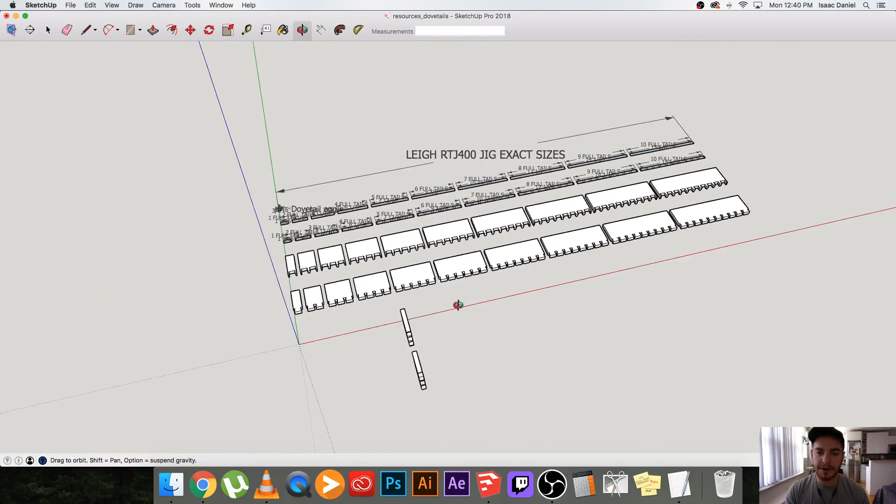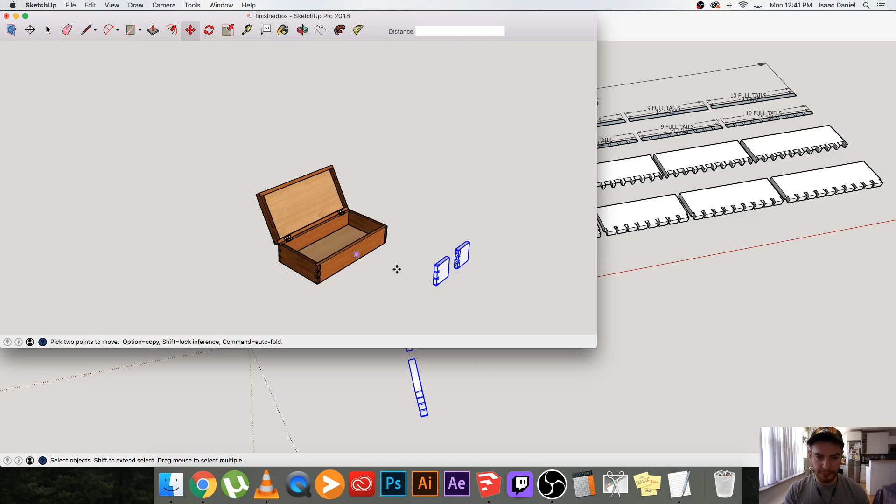I would definitely suggest, if you're going to use SketchUp for making furniture, to make design resources, and specifically if you're going to do dovetails, make a dovetail resource file, and you could just copy and paste these and bring it into another file that you've already done, and build your drawer in that file. It's super easy. So there's our finished box.